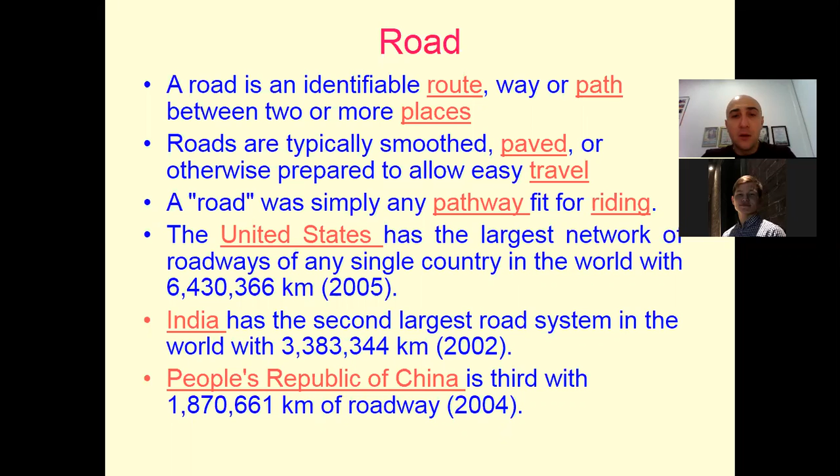If we talk about classification of roads, we need to divide the roads into several groups. First of all, according to size. There can be found single, double, four, and six lane roads. What does it mean? It means the width of the roadway lets cars move in one way if it is a single lane road. Double lane is mostly two lanes in one direction or in opposite directions. And 4, 6, and so on lanes just increase the width and size of the road.

Roads can also be divided according to national principles. For example, national highways. National highways are the main roads. They generally connect the major cities to the capital of the country. Also, they run through the length and the breadth of the country. Actually, national highways are provided with minimum two lane roads. So two lanes is the minimum size.

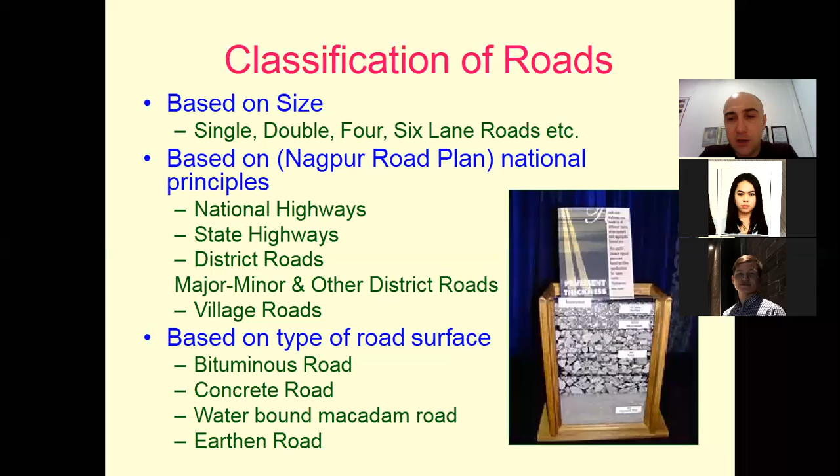The next road is a water bound macadam road, also called WBM road. These roads contain crushed stone aggregates. The aggregates are spread on the surface and rolled with sprinkling water. If we talk about the advantages, these roads provide better performance compared to earthen roads, mud roads, gravel roads, and other roads.

Another feature is that this road is laid in layers of about 10 centimeters thickness each. They are weak roads and may actually disintegrate immediately under traffic.

And the last type, actually there are many types, but maybe the most popular, is earthen roads. Earthen roads are laid with the soil itself. The main feature is that they are cheaper than all other types of roads. They are provided for lower traffic areas in the countryside. A good drainage system should be provided for excellent performance over more extended periods.

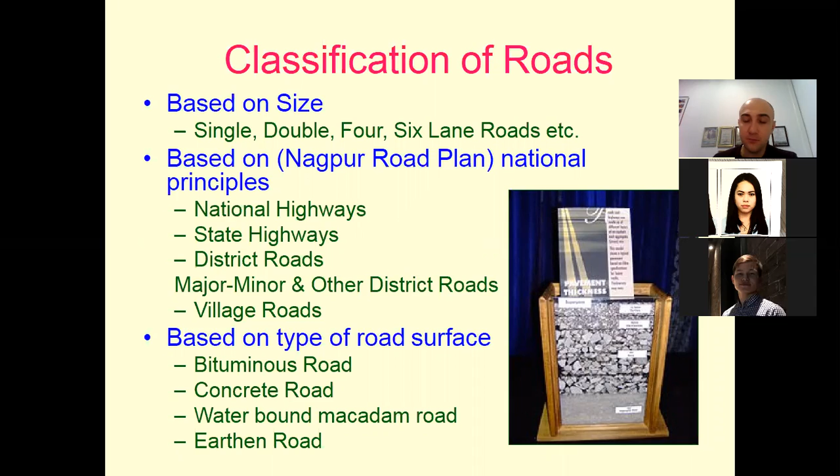So the main components of the road. So the roads in general can be flexible, non-flexible, and rigid. And each of these types consists of several main layers. In the picture you see some information about very important layers of the road. First, it's the natural subgrade. So it is soil which lies under the road.

Then there is the sub-base course. A sub-base course in general consists of rigid materials with a big fraction. So it's like a bearing layer of the whole road. That's why it should be very rigid and strong enough to carry the weights and transmit them to the natural subgrade level soils.

Next, it is the base course. So the fraction of that material is somewhat less. It makes the sub-base course more straight and horizontal, and in thickness it is approximately half of the sub-base course. If the sub-base course is 1 meter, the base course will be about half a meter.

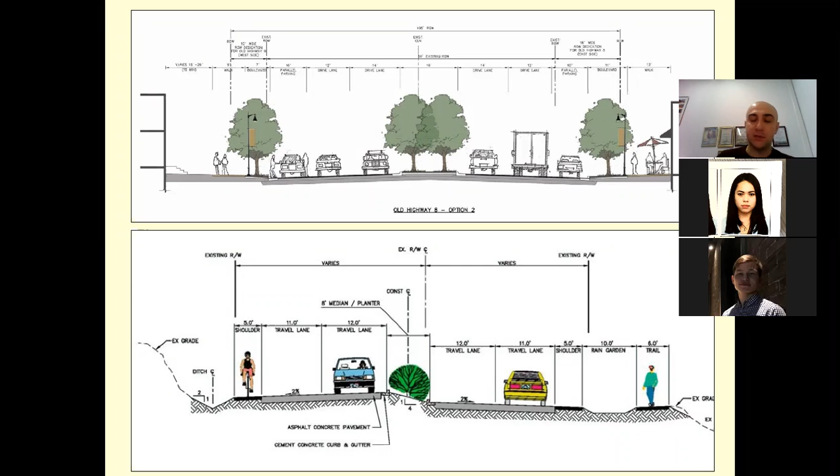And it gives the opportunity to make the road not only in one direction, but sometimes in opposite directions, perpendicular to each other. It will help to improve the conditions of the traffic system in the city. And of course, it helps to reduce gas pollution, because underground all gases are collected in special air conditioning systems. They are cleaned, and only then put out from the underground roads.

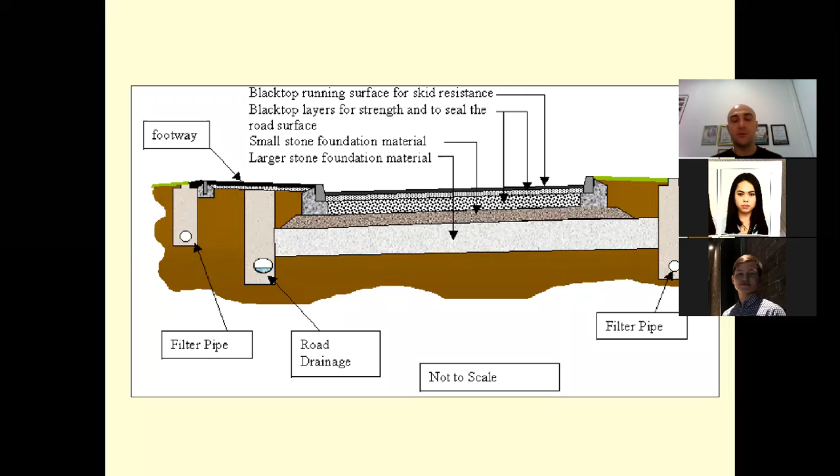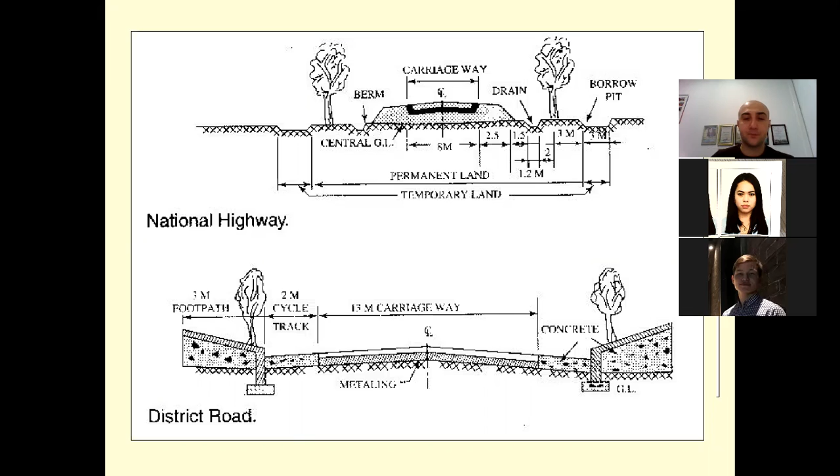Other district roads. So here is a section of various types of the roads, and most of all district roads and village roads. This is quickly handmade roads just for convenience of quickly passing from one place to another in the villages, between two districts, or maybe between two national highways. For example, a district road can connect to national highways and so on. So that's why.

But at the same time, you can see that a drainage system can also be found there, because without it, it will be very dangerous, and maybe not so dangerous, but the road will not be used as long as it would be with a drainage system. So it is very important to use a drainage system in the construction.

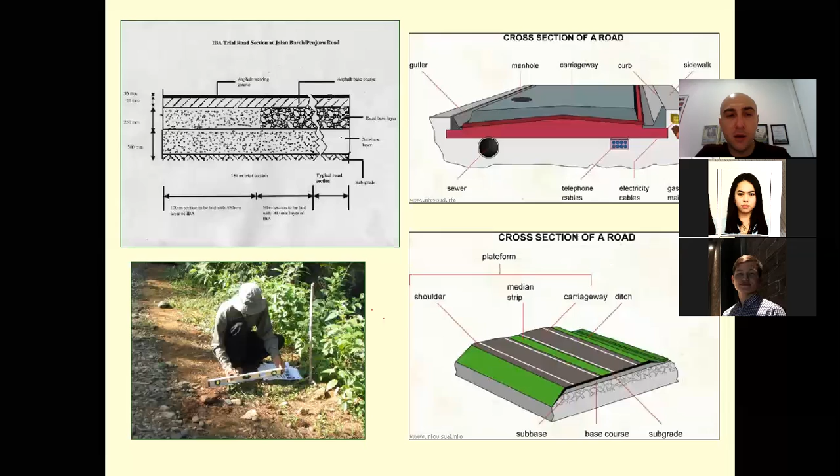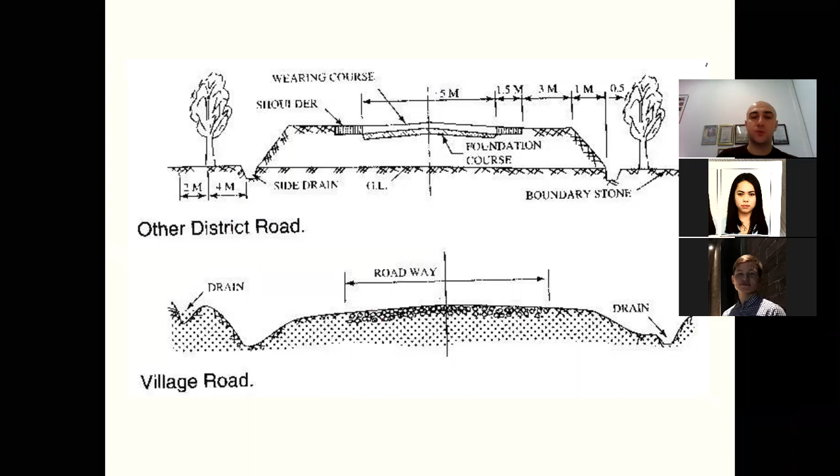So, do you have questions? In general, our lesson is going to finish. So I showed you all the information that I had, and if you ask some question, I will try to answer it. There are no questions. Maybe I will ask you some questions.

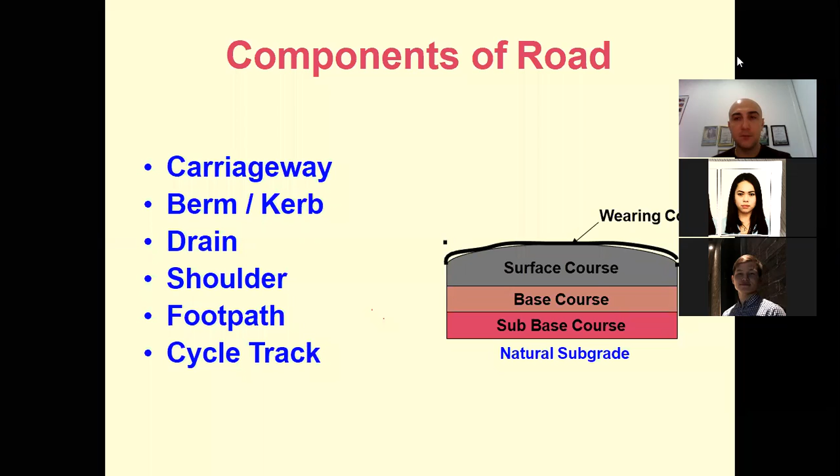In general, what is the road? How can you answer it? Students? Road? Yes, general road. In two words, what is it? Or maybe, what is the concrete road?